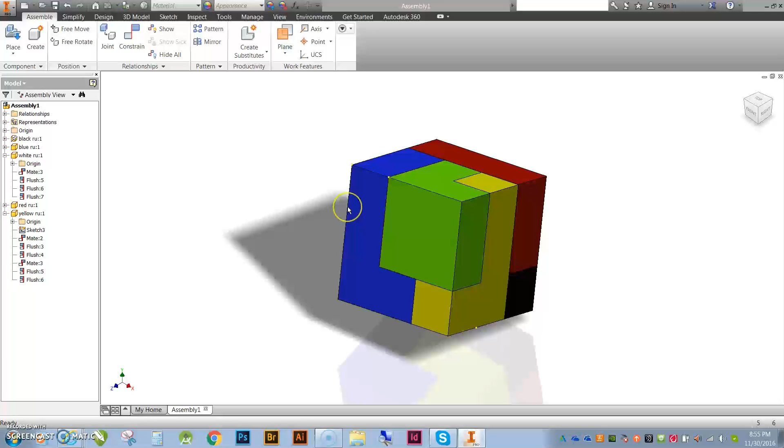Alright guys, by now hopefully you've made all 5 parts for your puzzle cube, and now you're ready to assemble. So I'm going to show you how to do that. As you can see, I have a cube that I assembled already, and I'm going to reassemble this thing and show you how to constrain it so that your puzzle cube cannot move around and is fully assembled. Alright, let's get started.

So as you can see, my interface is slightly different than yours. I'm using an older version, 2015. You guys are using the 2016 version.

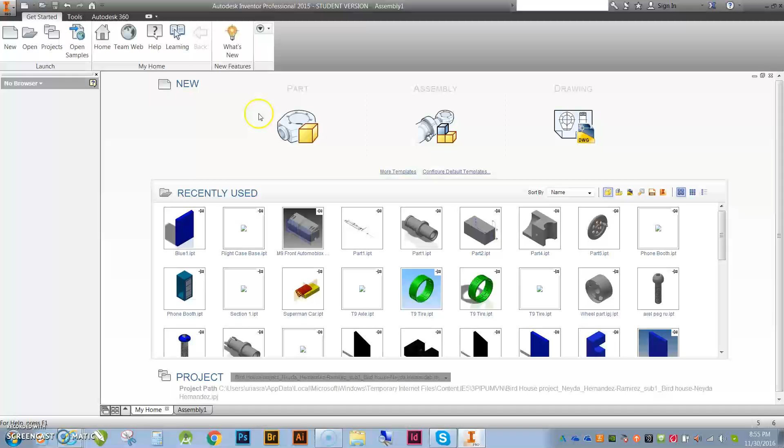So over here you have your part files or different types of files. Here's my assembly file. I'm going to select my assembly file, and then up here you should have 'Place.' If you happen to hit the drop down and see 'Place from Content,' just hit the drop down, hit 'Place,' and from that point on you should always have that in there.

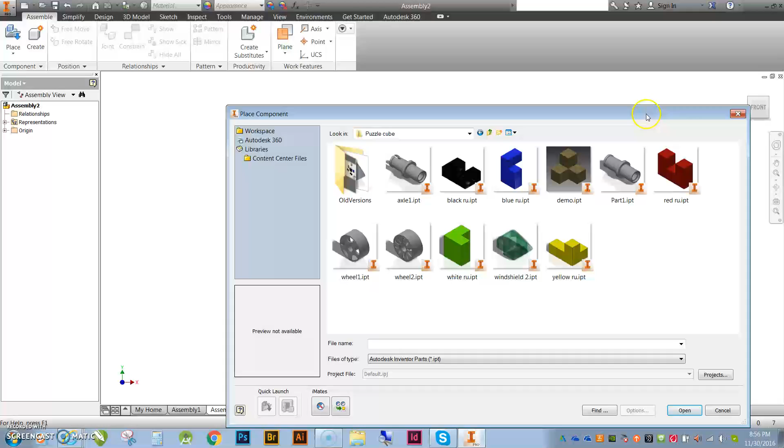So when you hit Place, it's going to ask you to go to your folders. Now remember I was preaching to you guys about making sure your folders aren't jacked up. I have an IED folder, and then a puzzle cube folder, and this is where all my parts are. So you can choose to bring in one part at a time, or all of them at the same time. It's up to you, but I'd advise bringing them all in at once.

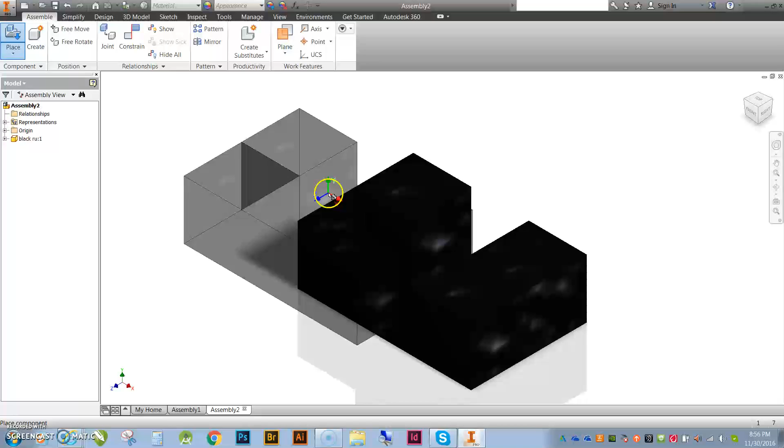It just makes it a little easier to work with them. So that's what I'm going to do. I'm going to go ahead and go with my black piece. As you can see, I have some errors here, but I'm not too concerned about it. I'm just going to bring that in, and then start bringing in all my parts. Unfortunately I have to go hunt them down, but that's alright. Click OK, click - I'm going to bring them all in, and then I'll be back.

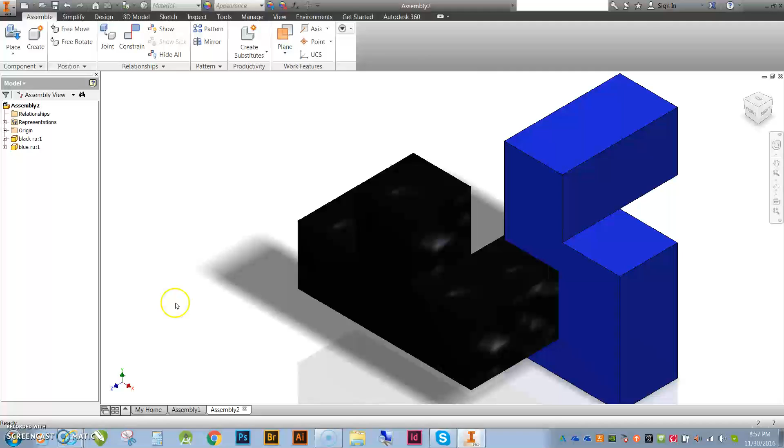Alright guys, so we're back. As you can see here, I have 4 parts, I need one more. The reason I decided to come back and show you this last one is because one of the things I forgot to mention is what do you do after you place it. So here, click to place it, and here you can see I have another one. All you need to do to get away from that is just hit escape.

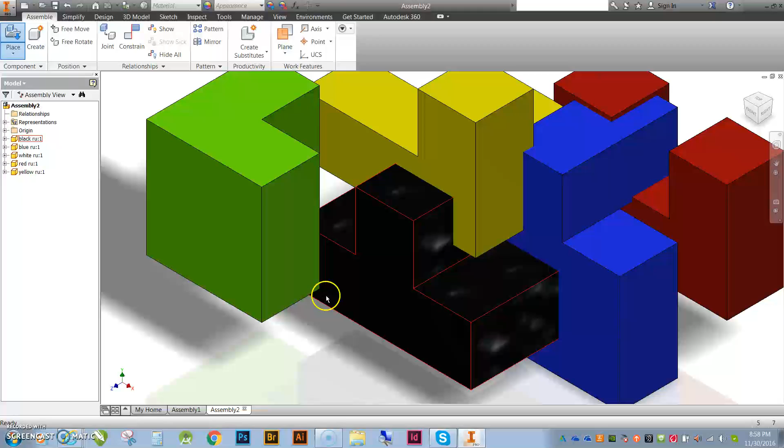There we go. So I'm going to zoom out a little bit. Here are my parts, I'm going to spread these out a little bit.

So now let's talk about constraints. In order to assemble your puzzle cube, you have to constrain it to other parts - that means you constrain it so it can't move. You can call it a mate, or a flush for this particular example, but there are several more different types of constraints you can use. Up here is your constraints option. If I hit constraint and hover, notice I can see the different types of constraints available. The two we're going to talk about most right now are mate and flush.

Hopefully you all understand what mate means - like something butting up against something, mating, okay? Flush is something that's even with another side, okay? So you're going to use a combination of these. Now think of it this way: in order to fully constrain a part, you have to make sure it's fully constrained up and down, side to side, and in and out, okay?

So up and down, side to side, and in and out - you are going to basically need 3 constraints per part in order to fully constrain that. It can be any combination of mates and flushes. Most of the time you're going to use 1 mate and then a couple flushes, but sometimes you are going to require 2 mates. Hopefully you guys will understand when I get rolling. All right, let's go ahead and get started.

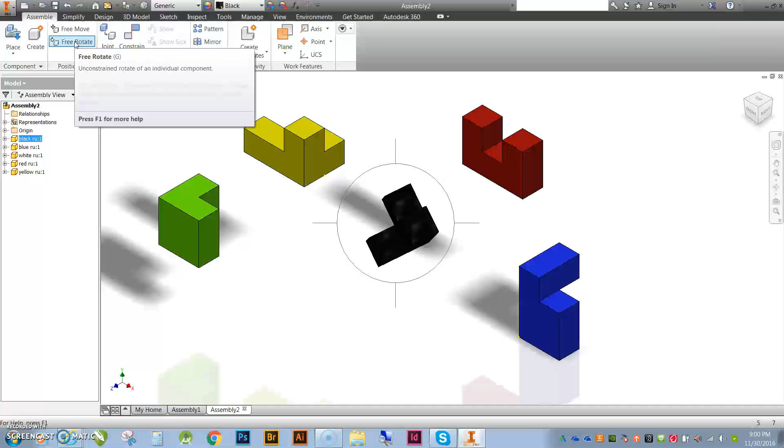The first thing I want to show you guys is this: if I click on a part and then hit the letter G, I can free rotate this around. That's the shortcut - up here is free rotate. Notice when I hover on it, you get the letter G in parentheses, telling you that's the shortcut. So I'm going to turn it around something like this.

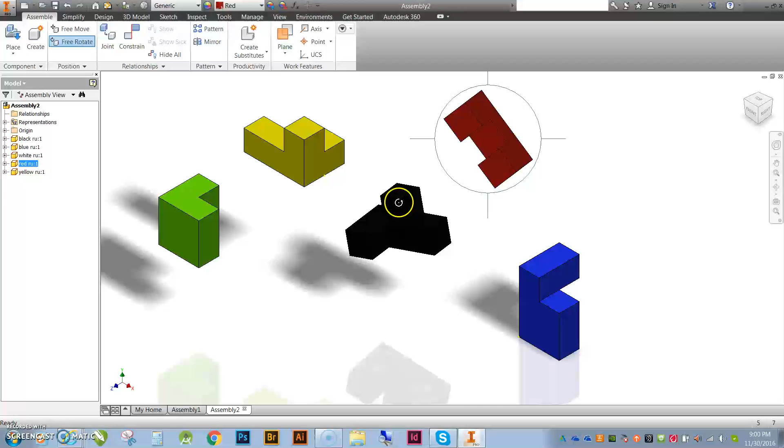Let's go with that. So the first part that I want to put on is my red part. I'm going to hit G and rotate that around like so, and make the inside of that go on the top of this guy. So I go constrain - mate is already selected. Here you can see the arrow pointing. So I want that to mate with that, and then I hit OK.

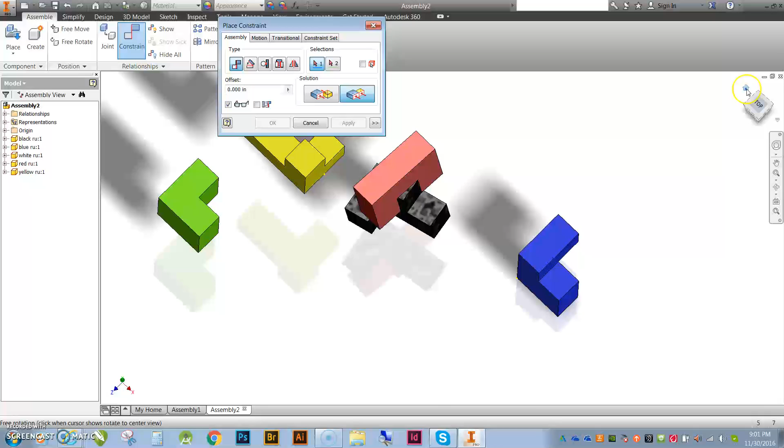Now I'm ready to start flushing. So I have a nice mate. Now I want to flush the sides - basically I want to make them even. I'm going to spin that around, go home. I don't like that.

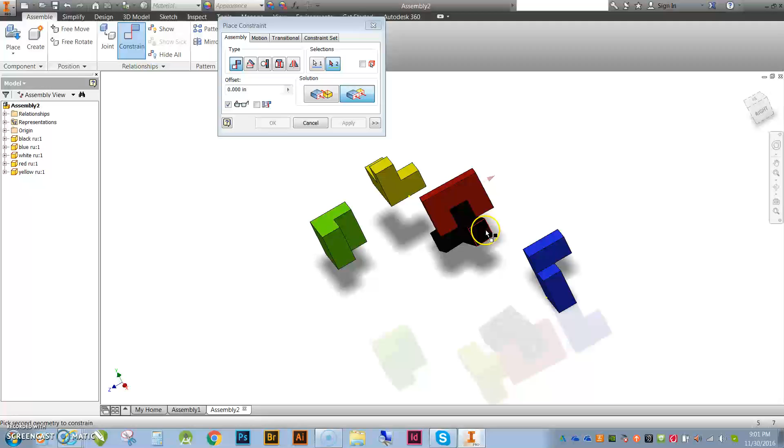All right, so I'm going to go flush. I'm going to flush this side with that side. Apply. And I'm just going to flush the back. I still have flush selected - I'm going to flush the back with the back of the black part.

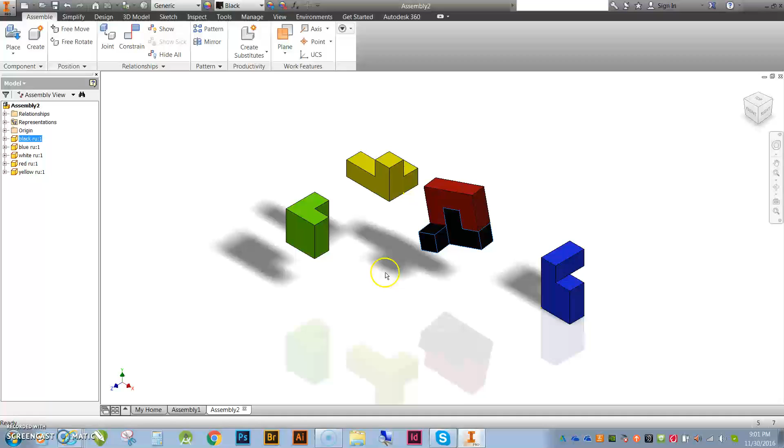Oh, one of the things I forgot to tell you - sorry. When you bring in that first part, make sure you guys ground that first part. So just right click, go up to ground, select ground, and now that part won't move. And this part isn't moving either, so that means I fully constrained that part.

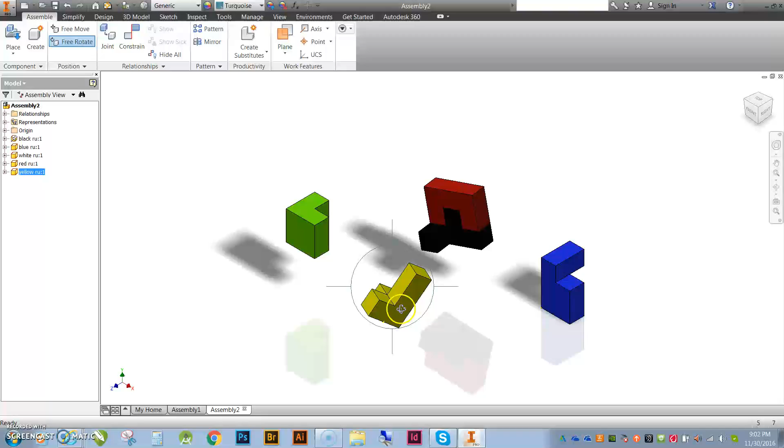Constrain - I'm going to mate this backside to right about there. Apply. Now I'm just going to do some flushes: flush, flush, apply, and flush, flush, apply. And how do I know if it's fully constrained? Well, if I grab it and try to jiggle it around, it does not move.

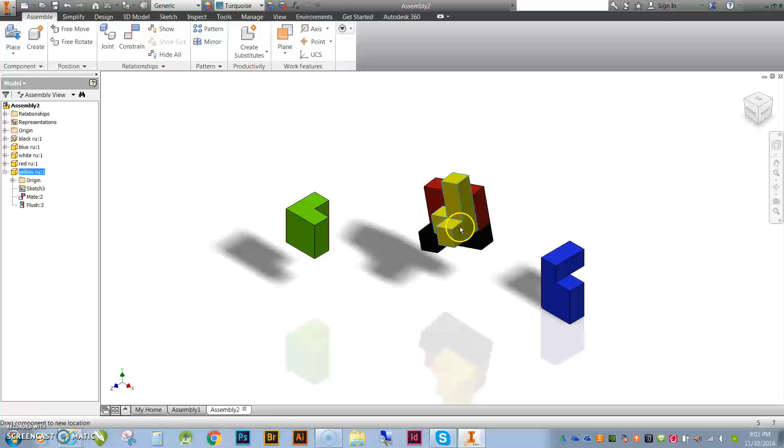I'm going to come over to the yellow part. Maybe you guys accidentally make something and now that's not correct - use your browser, come over to this flush, I'm going to right click on it and delete it. Now I'm going to show you what I mean - see, notice how this part moves around now, so it's not fully constrained. All right, so I'm just going to go back, go to flush, and I'm going to flush that again - top to top. Apply.

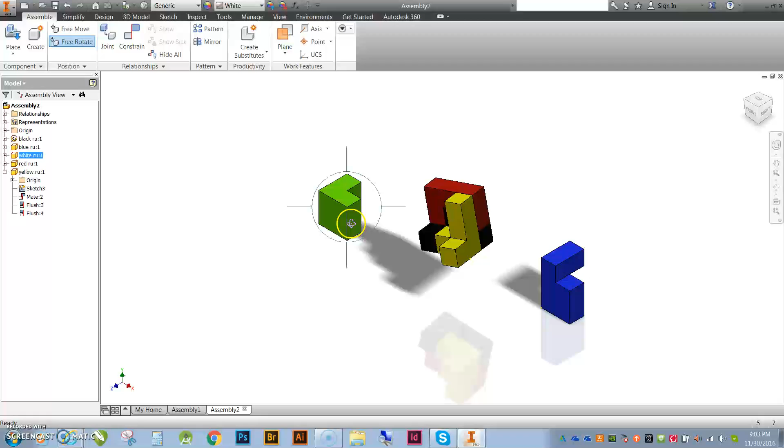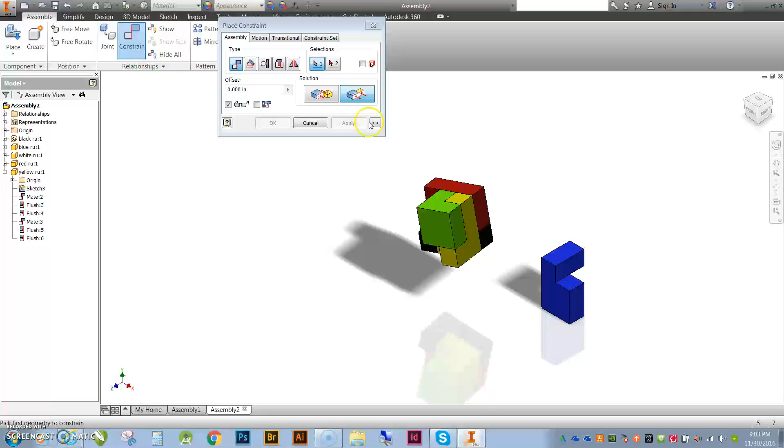Now I'll do this green one here, we'll finish up. I'm going to hit the letter G and rotate it around. All right, so mate this, that, apply, and I'm just going to do some flushes - flush it, apply, flush it, apply, cancel. And now you can see it's fully constrained.

All right, I'm not going to do the last part. Hopefully that gives you guys enough information to be able to assemble your puzzle cube. And the next thing that we're going to do is we're going to make a presentation when you're finished assembling.